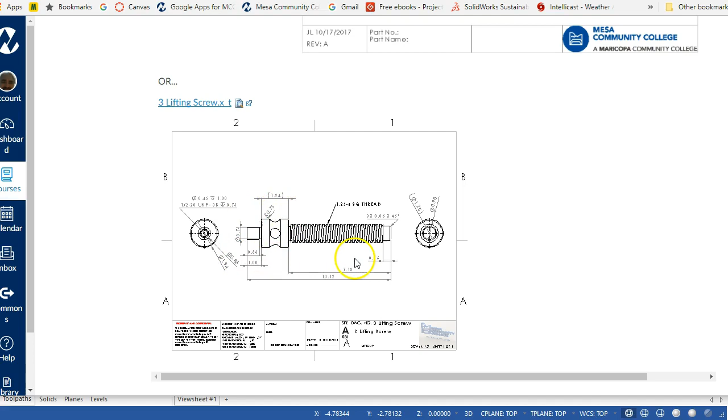So we'll look at chucking this up. Don't know that for being mild steel, we might need to center and have the tailstock come in for support. Anyway, this is our solid, so we're going to File, Merge, and under Types, we will find the Parasolid files, X_T, and then navigate to where I placed those. And we'll bring in the lifting screw.

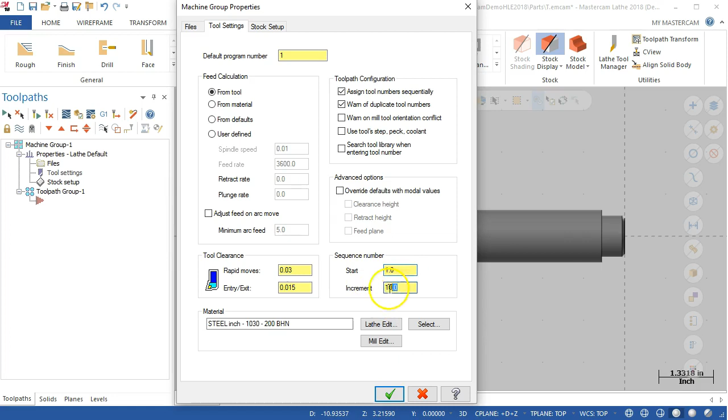Alright, I'm going to go over to Outline Shaded, and we're going to rotate this 90 degrees. Alright, so that puts the 0, 0 on the nose of the part. Now as we rotate around, you can see some of the geometry. Alright, so first thing we're going to do is set the machine to lathe. Go into our tool settings. And we'll stay with the steel.

Properties, we're at 2 inches diameter. Length was 10 and change, so 10 will do it. And if we need to, we'll put in the 1 too. Alright, position along x-axis, we're going to move out 10 thousandths so that there's material to face off of the end.

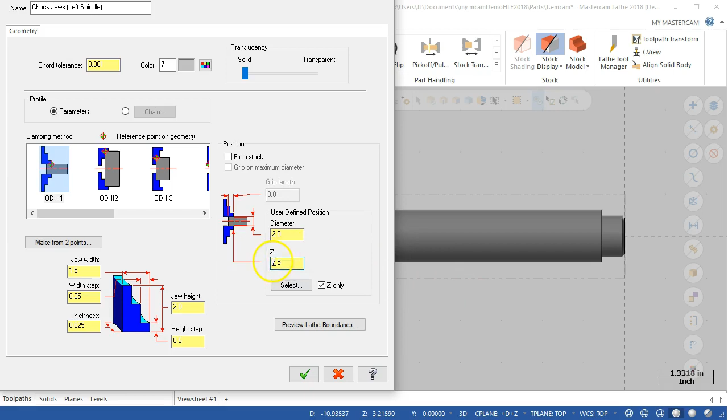Go ahead and accept. Going into the chuck jaws and the properties, we were 7.18 back, so diameter will be at 2 inches, and let's go 7.5. Alright, so I think that's probably going to be negative 7.5, so yeah. So we're pretty much on this geometry with quite an overhang. Pretty much unsupported geometry at this point.

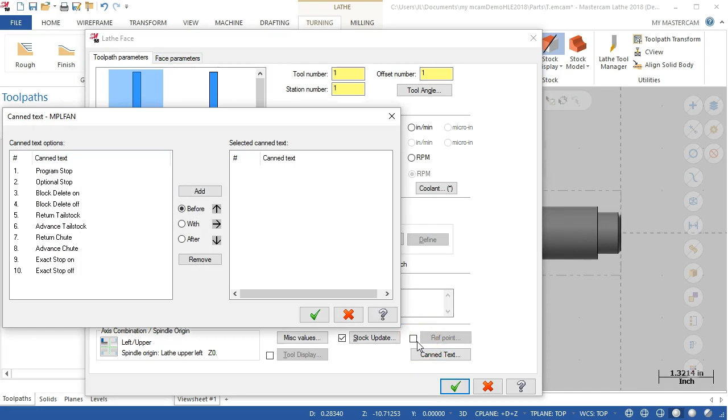So given the lengths, we'll start off with a facing operation. And let's go ahead and stay with the 80 degree. We'll slow this down a little bit. Constant surface speed of 200, and max RPM for this we'll set at 1000 RPM. Alright, going through library tools, tool filters, miscellaneous values, stock update, canned text. Don't really need any of that right off. Probably the one of interest would be the canned text if we needed to add in stops or machine stops.

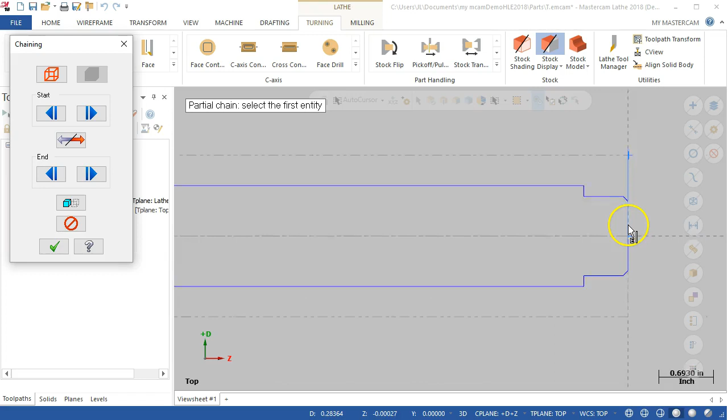Alright, so if I stay with the defaults, entry amount, finish, then that will generate our first operation to establish our Z face. Next operation will be to rough, and we have a partial. Oh, we also have a solid. So as soon as we go over to solid, it switches to wireframe. And we're going to pick the first entity, so I'm going to zoom up to where I can see it, get the arrows in place. And then I do want to come off of the chamfer on the rough.

Alright, so we're going to stay with the 80 degree tool. Back off on our feed rates, so 0.005 of an inch per revolution, and constant surface speed of 200, and then max spindle speed of 1000. Alright, depth cuts, even equal steps, or we can tell it to go to auto. Depth cut, let's go 30 thousandths, minimum cut of 1 thousandth. Entry amount 0.1, exit amount 0. Stock to leave, let's drop that down to 5 thousandths and 5 thousandths.

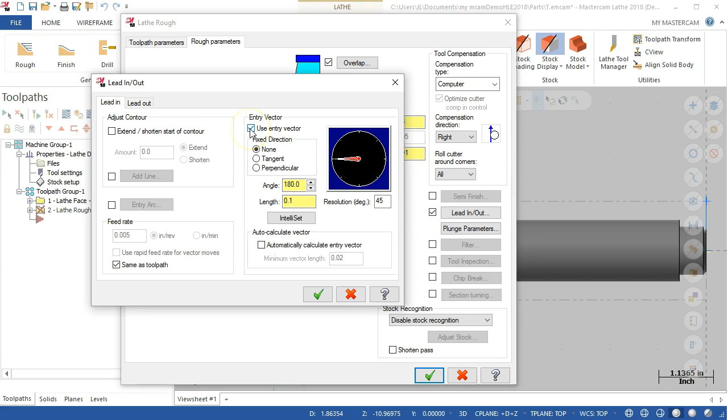And we'll look at the lead in, lead out. So haven't had great luck with the roughing on the entry and exit vector. We already extended the entry, so let's go ahead and extend the lead out. And we'll take a quick look at plunge parameters, that it will bypass any of the reliefs. So I'm going to use the stock for outer boundary and go ahead and start. Alright, so our overruns have a couple of passes, and then we're removing material up through that geometry.

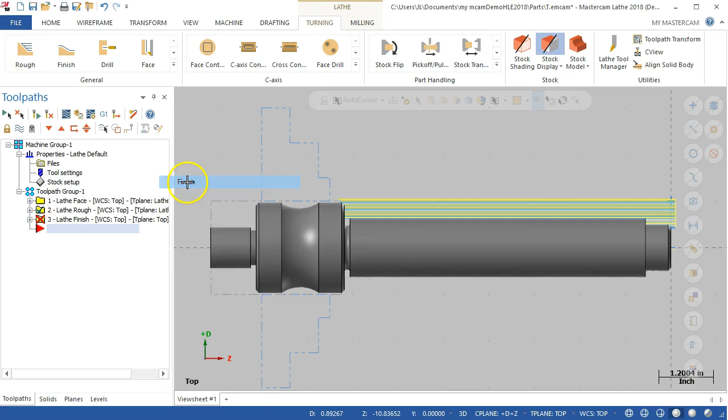Alright, next going in will be, let's go ahead and finish. Pick up the geometry and find our end. And we'll stay with the same tool. And for a finish pass, 2 thousandths, max RPM of 1000. Finish parameters, pretty straightforward. No stock to leave, one finish pass. Probably can get away with the vectors, bringing that out. And then the lead out coming back at 45 degrees.

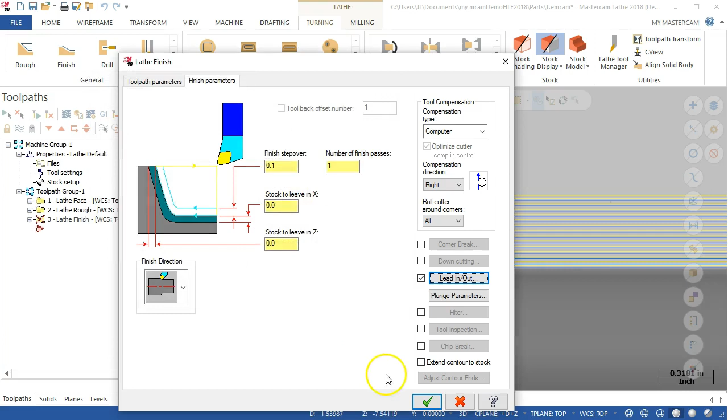Okay, so this one I overran to clear the material. This one we're backing out of. Alright, so mainly when I turn this around and feed back through this geometry, then I would want to overrun that edge. Alright, so we're going to highlight those and turn the display off. Before we can go into the threading, I want to pick up the groove. And for something different, I included the radius in this one. It's not square, mainly as a stress riser, that it would reduce the stress rise.

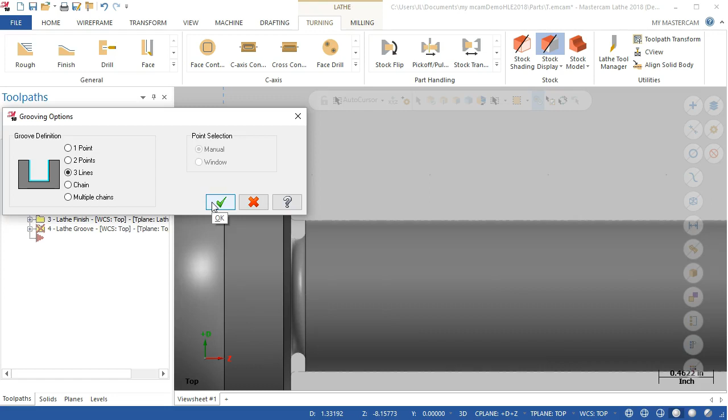Alright, so grooving. Let's go with 3 lines, see if it'll pick up. Alright, so the in, the out, and the OK. Only lines. Alright, so need to back out of that, so Lathe tool groove.

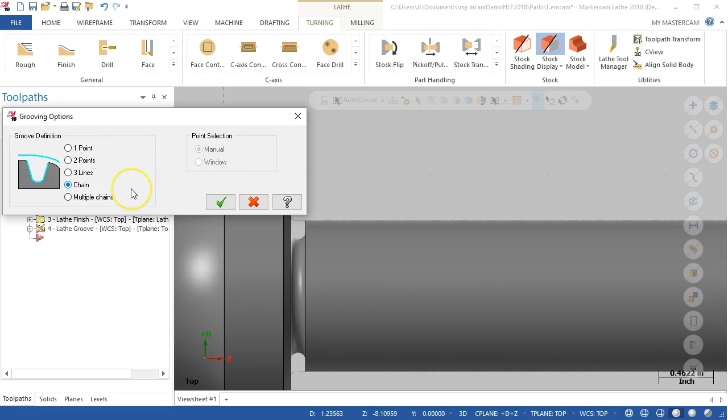So not really allowing me the point, so escape. So go with the multiple chain, and this will probably cause it to come up short, but we'll see how far that gets into the geometry.

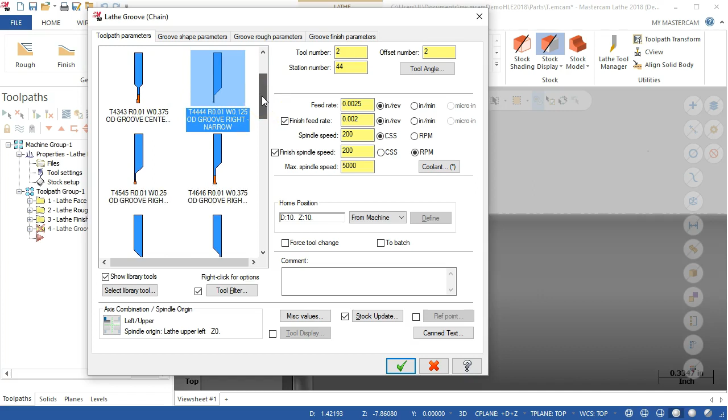Alright, so I would like a 1/8 inch grooving tool. See, and that one's right. Okay, and then we're going to go to double end radius. D is 0.125, B is 0.125. And I'll just take a quick look through here.

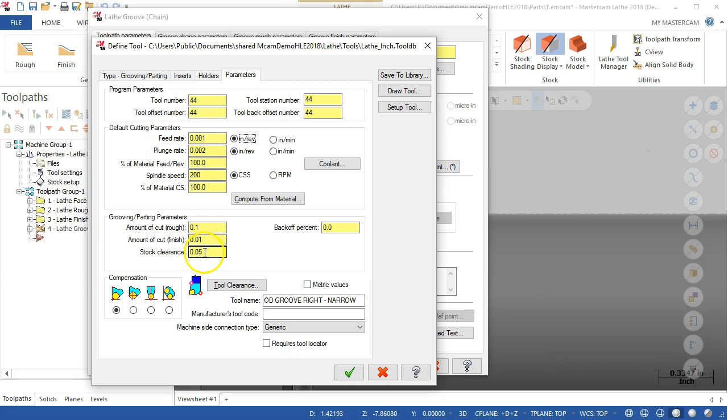And parameters, slow down. Amount of cut on the rough, and then amount of cut on the finish, stock clearance, if we need those. Alright, grooving, shape parameters, angle 90 degrees. We're not going to rough, this is just going to be a straight plunge. Alright, so I'm not really going to get into the step overs.

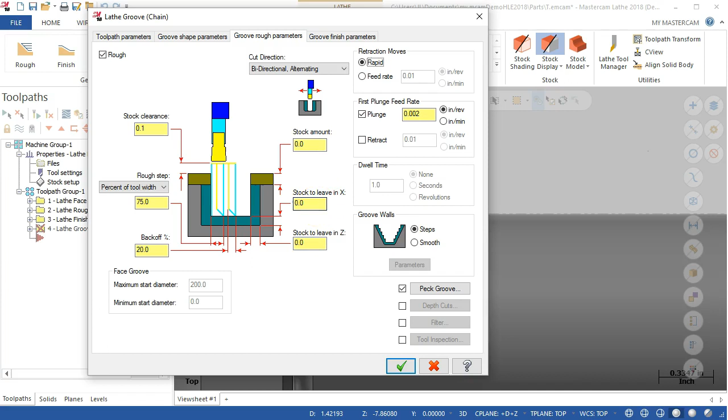So that being the case, maybe you want to do the rough and have it peck. Alright, so 100 thousandths on the clearance. That's going to come down on the wall. Still not doing the steps, stock amount. And we'll go ahead and 0 to leave in X and Z. And then the peck. And we'll stay with the 30 thousandth. And go ahead and see what that'll generate.

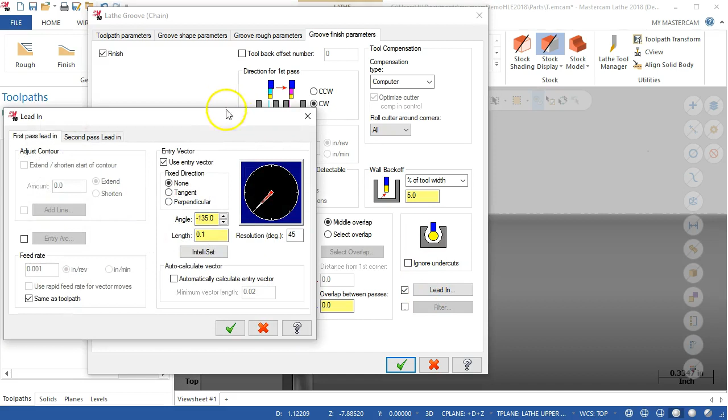Didn't like the toolpath. Now let's see. Nope. Okay, so no rough. We'll try the finish. Double check. Alright, so we get a toolpath and a little bit of relief. Alright, but not really as deep as I'd like, so that may be something that we'd need to identify in the program and update that value.

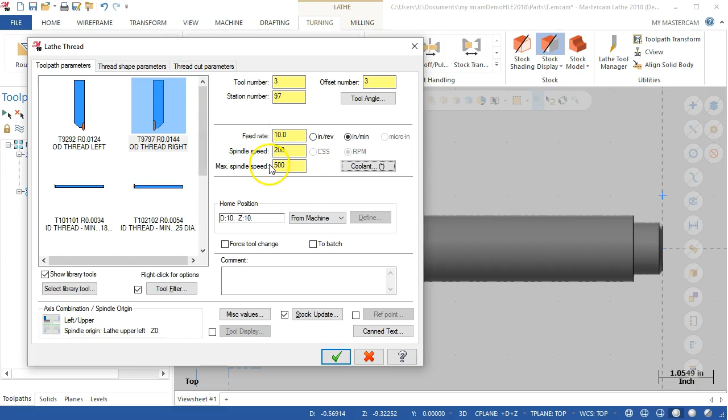Alright, for threading tools, we're not supporting a square tool. So the threading right, threading left. Feed rate of 10. Spindle speed of 200. Max we'll keep at 500. Alright, again, these are kind of guesses as we go along, see what the result is. With the threading and the steel tendency to tear, I'm going to keep that number a little bit lower.

Alright, the lead, we're going to be 0.25, so our 1 1/4 inch for square thread. Peak to peak, valley to valley, 1/4 inch. Included angle, now get a 50-50 shot at it, we'll go 90 degrees. Now we'll try 180 and 90. Really not expecting this to generate our geometry. 1.25 and 1 inch on the minor.

Alright, end position. Minus 7 we made it to 1.8. So let's go ahead and minus 7.1. We'll shorten it up, see how far that'll get. Thread orientation is the OD, taper angle is 0. Really not going to find this thread form, and we'll deal with the allowances after we get into the cut. So 100 thousandths clearance.

Cut depth from equal area. As the triangle goes in on a normal 60 degree, as the triangle gets bigger, then the depths of cut reduce. I think we want to do equal depths. And first cut of 10 thousandths seems a little bit heavy, but a good place to start. One spring cut, clearance, lead in angle, and normally 29 degrees, but I'm going to try 45.

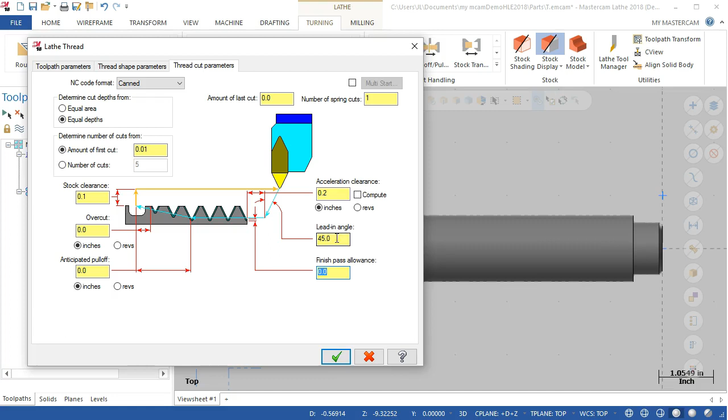Cut with the current thread. I think I was referring to that one, but let's go ahead and see. Alright, so if we go back over to View and into Wireframe, yeah, that's a really neat thread. Alright, so what did I tell it to do? Lead. Alright, well, we stay with those. Stay with the defaults. Okay, and the pull-offs, we're not going to angle it out. Well, usually would see the V's.

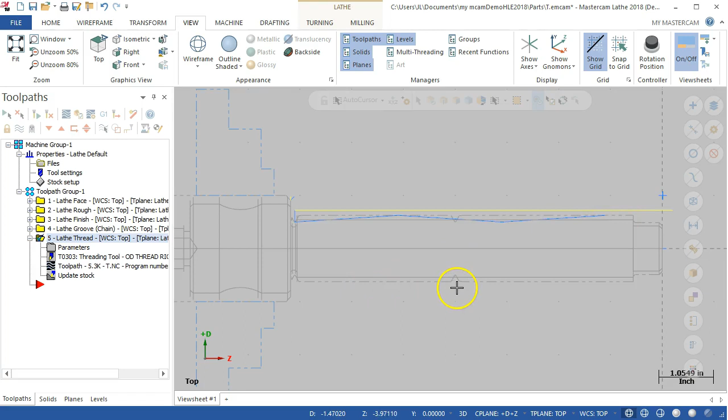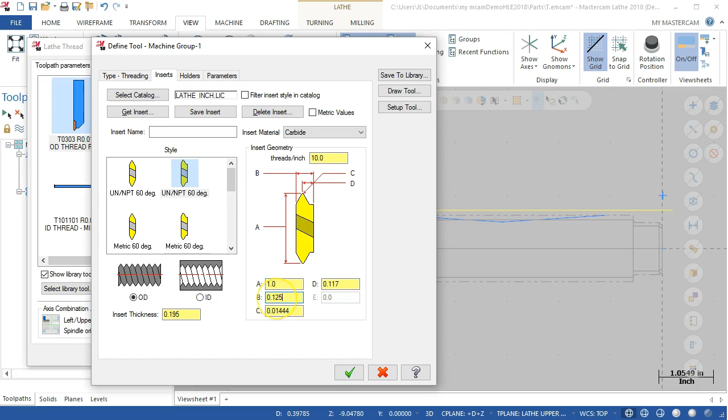And then the other thing was, let's see, I picked right and 14 thousandths. So B with a 0.125. And different parameters. Okay, update.

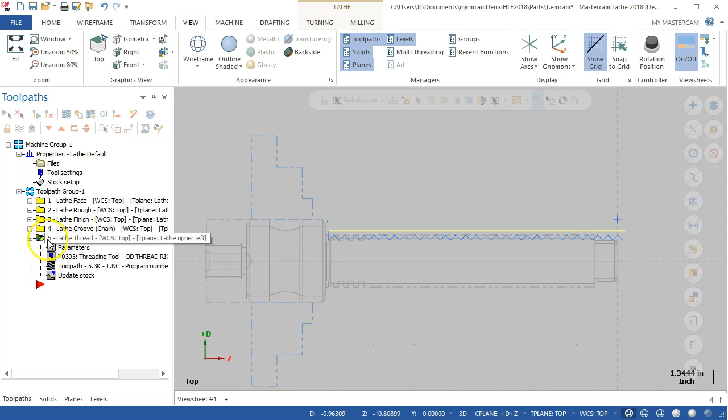Oh, and lead is 0.25. Threads per inch is 4. Alright, so I was thinking inches per thread. So let's try that again. Alright, so see the sharp V's? They're pretty much going through the steps and pulling out at the end of the relief. Alright, so that gives me my first start of the geometry. So I'm going to go ahead and save.

Alright. Then the one that usually makes me want to start a new file is trying to shift this geometry to the back. There we go. Alt 4. Alright, so get it into perspective. Now for the machine group, if I just add another toolpath group, it's going to be in this same orientation. Basically the stock setup, the chuck, everything picks up that same group. So we need a new machine group for the lathe.

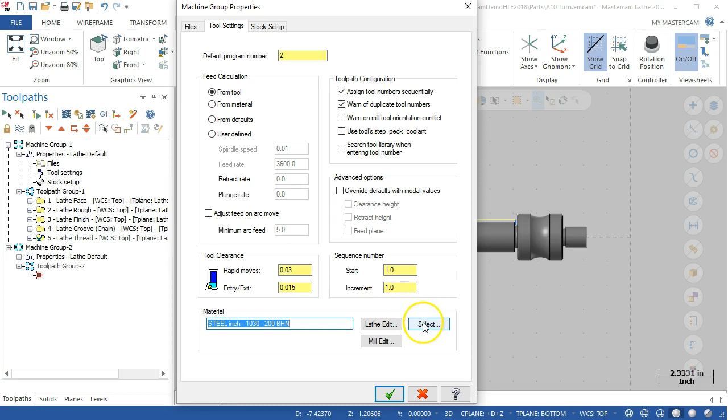And pick up a program too. So we're assuming no sub spindle, single spindle machine. So we're manually going to turn this around and pick up our geometry. Alright, so we're still in the top. And before I go any further, we're going to jump over to the levels, the planes. And currently we're in the graphics and the tool plane. Direction is out.

Alright, so I want to add a new lathe plane with a positive D, and what I'm looking at is the positive D, positive Z, and we're going to stay with positive D but make a negative Z, and that was for our upper left. Okay. So if we make that the tool plane, and let's show the gnomons, so D and Z. Alright, back over to the toolpaths.

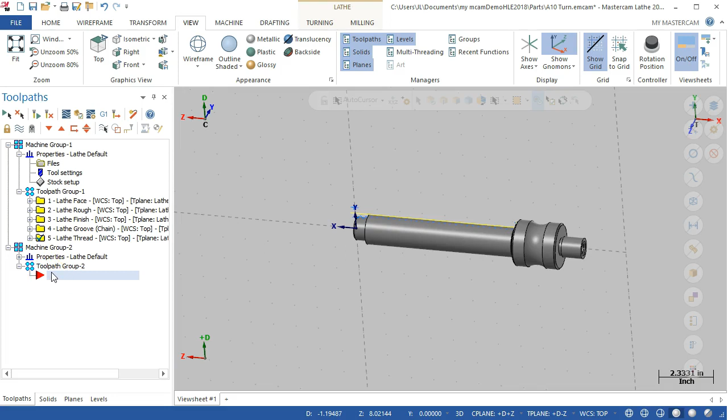And we'll pick up the top plane, and we're going to switch it over to D and Z. Alright, still left spindle, position and orientation. And I'm going to move position on machine, position on stock. We're going to select. Alright, 10.12. And Y. Yeah, that one should have stayed 0. Alright, so in coordinates, global coordinates or world coordinates as opposed to the lathe coordinates.

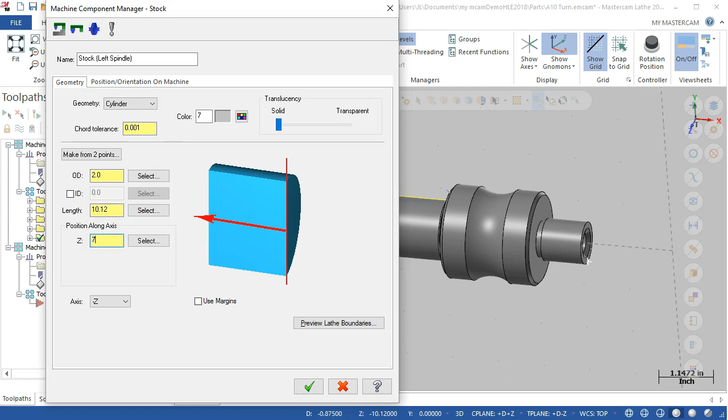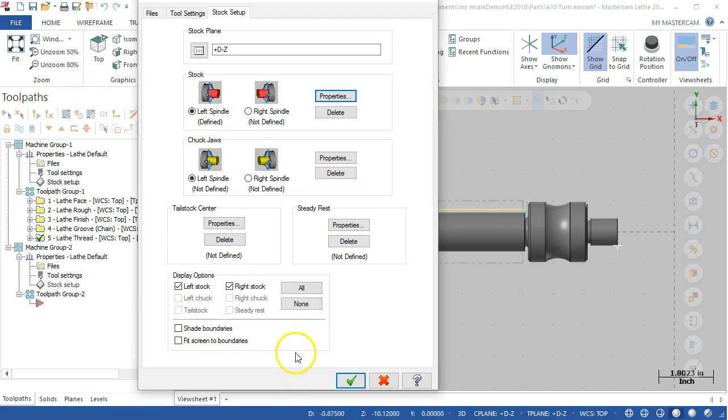Alright, so let's fly this out where we can see this a little better. Still 2-inch stock, length of 10.12, and position along the z-axis 7 inches. Preview the lathe boundaries. And don't think I got it. Got the D and the Z. Alright, stock left spindle. Okay, we only got part of it. Okay, so I have the plus D, Z. Oh, let's go ahead and set the current.

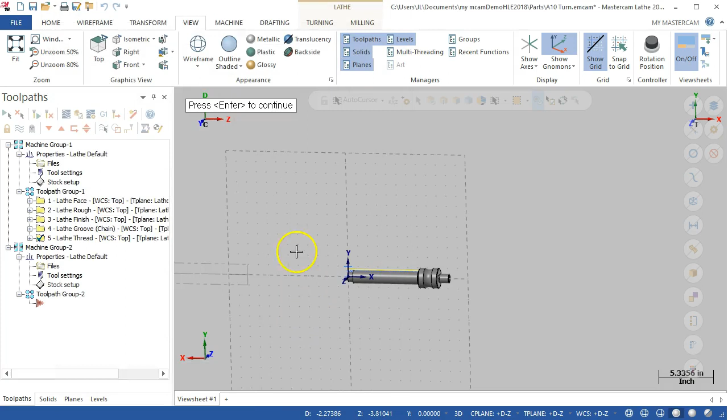Okay, so construction and tool, and then world. Alright, so let's see if we can get this to line up. Okay, so shifted it a little too far that way. Okay, got the stock ramped up. Orientation. Alright, chuck jaws are going to be at 1 1/4. We're going to hold on to the threads.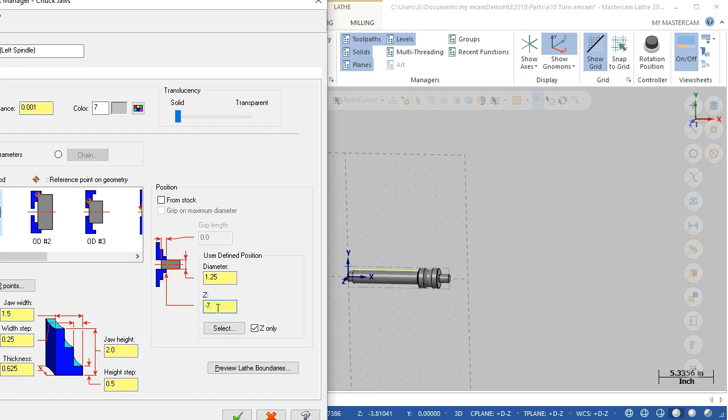Alright, so those are still out there. And so we're going to switch to a positive. Alright, so we're chucked up pretty close to our geometry. I think that's going to do it for the orientation. So critical that we get everything in that plus D minus Z orientation. Alright, well, okay, so now when I go Alt 1, now the origin did not shift. So that's still a problem. So double check the stock setup. Alright, we're at the plus D minus Z.

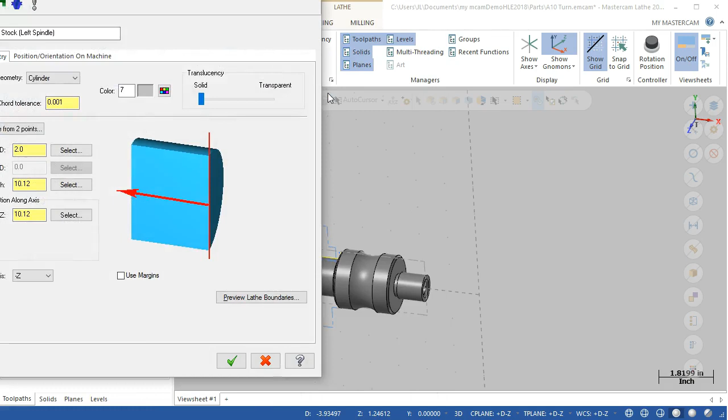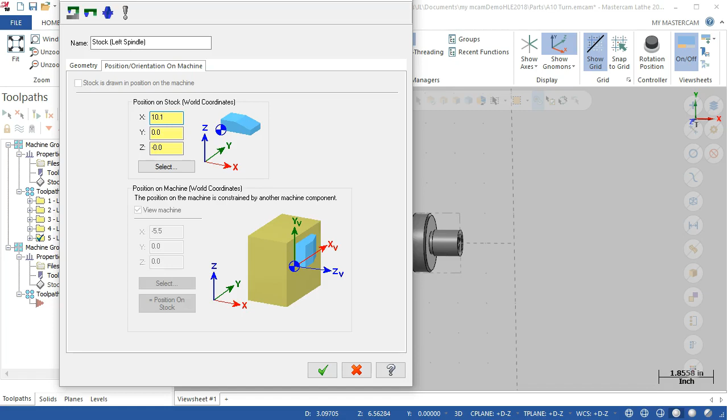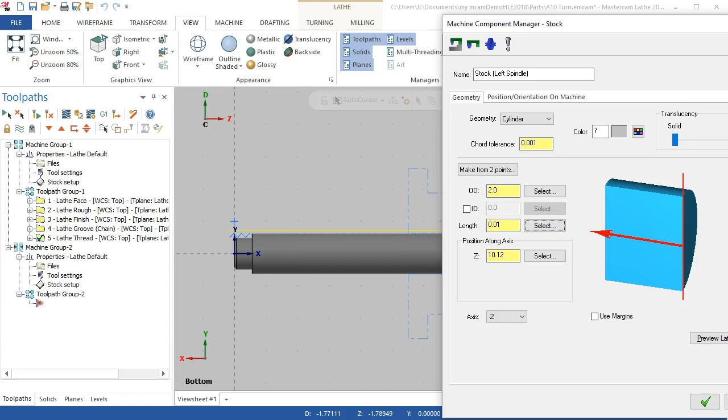Okay, OD. Line to define stock axis. Well, we don't really have a line, do we? Okay. Alt 1. Double check. Let's go with the 10 thousandths. Now that just shifted me back. Okay, so very small. Alright, so my orientation position on stock.

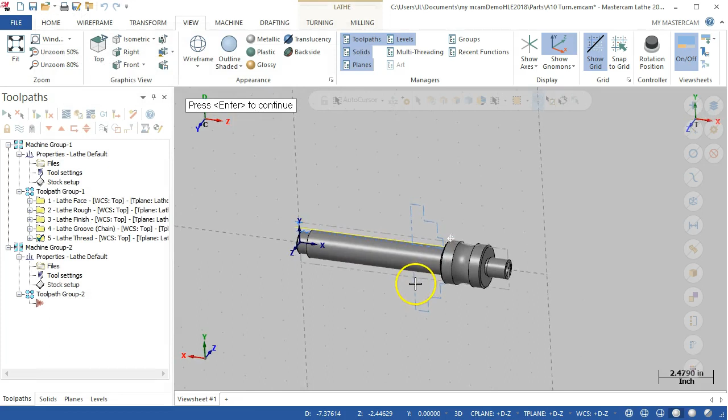Okay, so let's double check. Gotta be something I missed. Alright. So we set the axis at negative Z. Let's shift it to positive Z. Alright, so that took my position along 10 thousandths. Alright, so that's looking better. The origin still didn't update. That gives me a slightly different view. Okay, so that was what I was looking for, is the reference point on the component. But still didn't jump over. Okay, so since DZ didn't move, let's go ahead with one more.

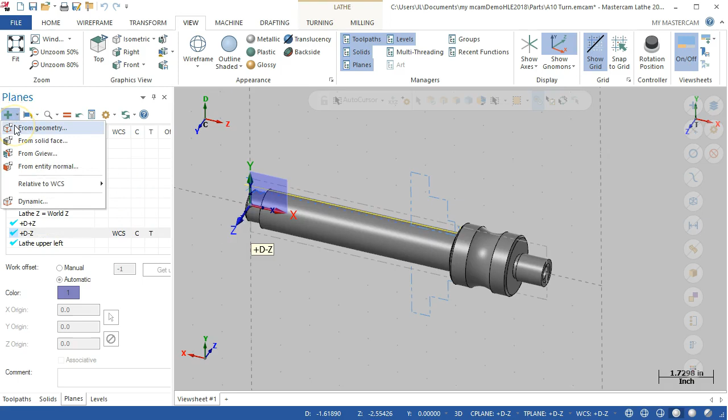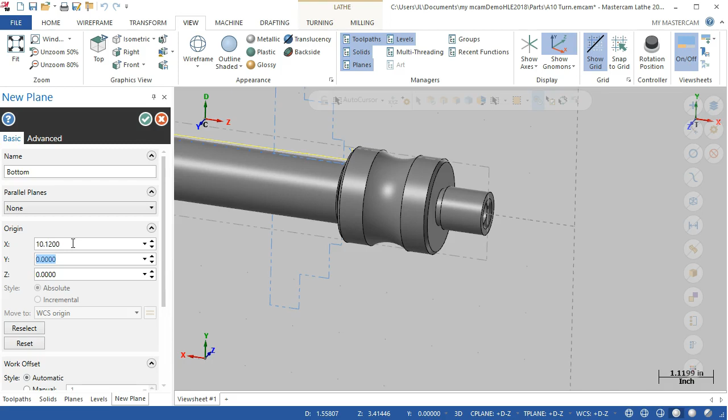Plane from geometry. Set construction plane by geometry, and then select entity. Well, we don't have any flats. Not getting any selection either. Alright, so that's not looking like a good choice. How about from... still not going to let me have the plane. Okay, relative to the WCS, and we were in the top. Now if it'll pick up the X direction, 10.12.

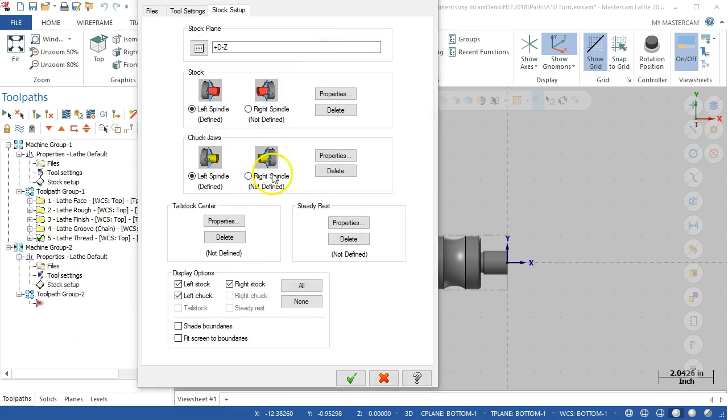Okay, we'll go ahead and set. Alright, and that got my origin. Now it's facing with my Z negative. Okay, so bottom dash 1. Let's go back to the toolpaths group. Make sure that we select that as the coordinate. Double check our lathe boundaries. Alright, so since that updated, I was chasing that the wrong way. We're going to go back to Z negative. Alright, so we got all these fun parameters to setting up that plane. And then it shoots it out there for the jaws.

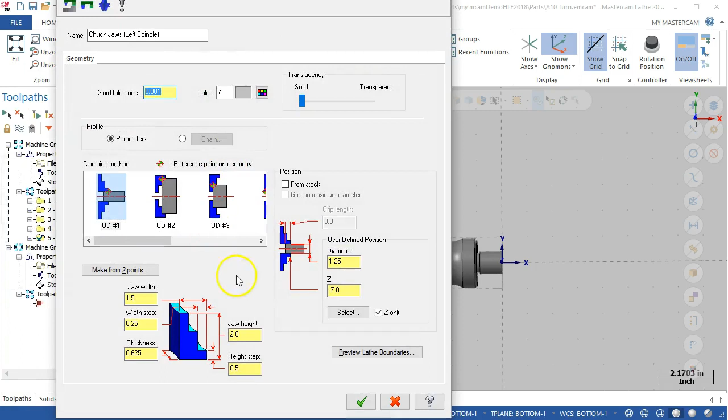And that's probably going to be a little far, but okay, bring it a little closer. Alright, that'll work. Alright, so a little bit of gap, but show us the preview. Alright, back to Alt 1. Alright, so it's one of the reasons I said that going through the process of setting the plane, getting the correct orientation, getting the stock, getting the origin placed on the new nose, it's about as easy just to start a new file, and I can't say that this is the most intuitive process.

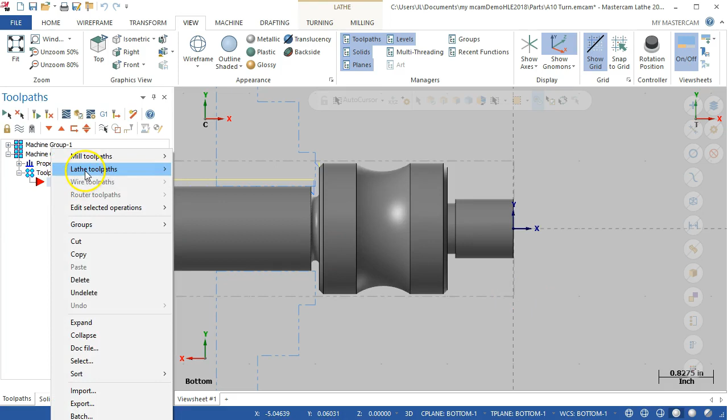Alright, so let's go ahead with the lathe toolpaths and face. Going to stay with our 80-degree. And this is going to be a little more rigid.

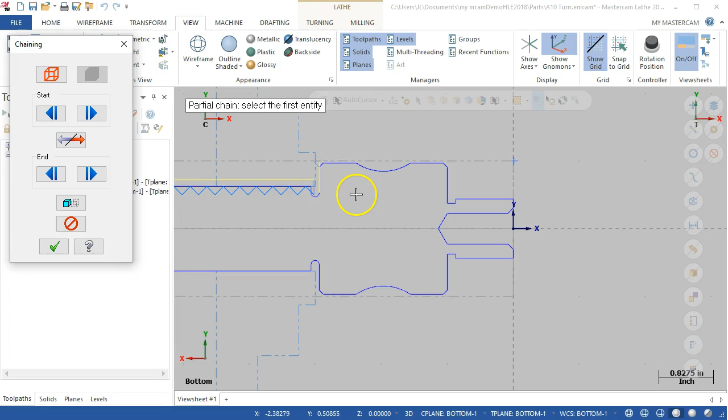Max at 1000 RPM. Stay with the default face parameters and pretty much in and out. Lathe toolpaths. I'm going to stay with the rough. Contour rough would tend to follow. So pretty much this will be the contour rough as opposed to just picking our geometry. One of the things you want to be careful of is you can select this bottom, but since we don't have a turret facing that direction, we will want to pick up our geometry.

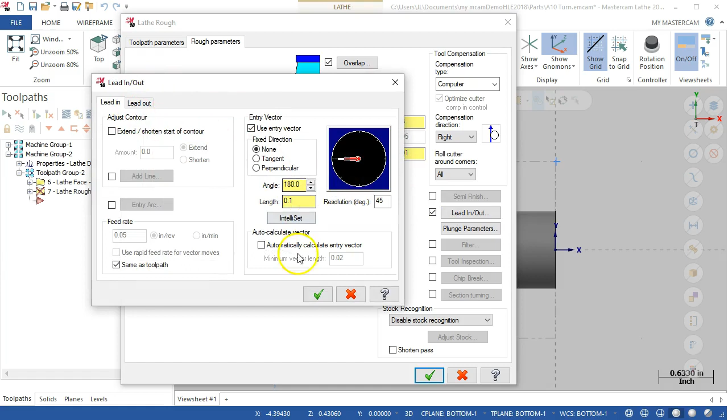Alright, so the roughing. And then staying with the rough parameters, let's go with equal steps of the 30 thousandths still. Not so much lead in, lead out on this one, but the plunge parameters, we'll make sure that it ignores that relief at the end. Okay, so those all go in and make the cut. Previously we ran the stock off that way, so now we have that material. So face, rough, and then we're going to groove.

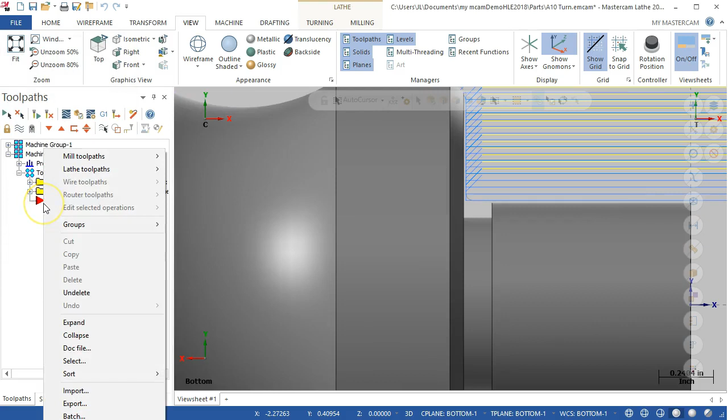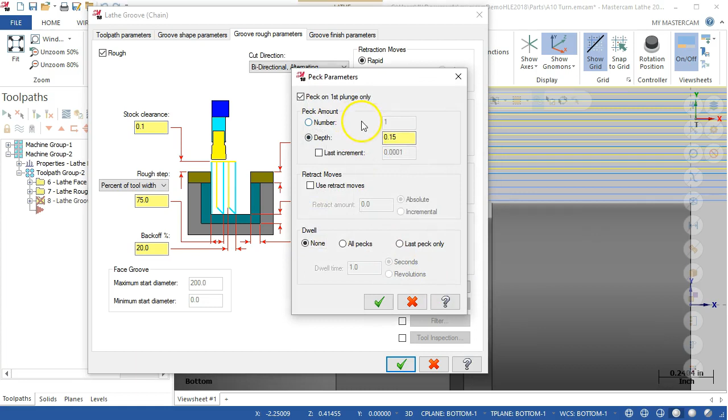So we'll go with the 3 lines. And in. Must be the same length, alright. Alright, so let's just try the chain. Alright, so we'll need to double check. Alright, so standard insert. And drop that down to 1000. Go back to 1000. Let's see, at 1/8 of an inch, we're pretty much, and we'll see if we can peck. Just went 150 thousandths to see if it's going to cooperate.

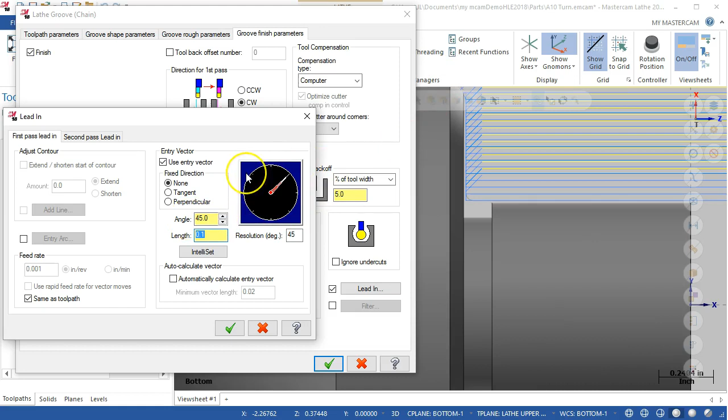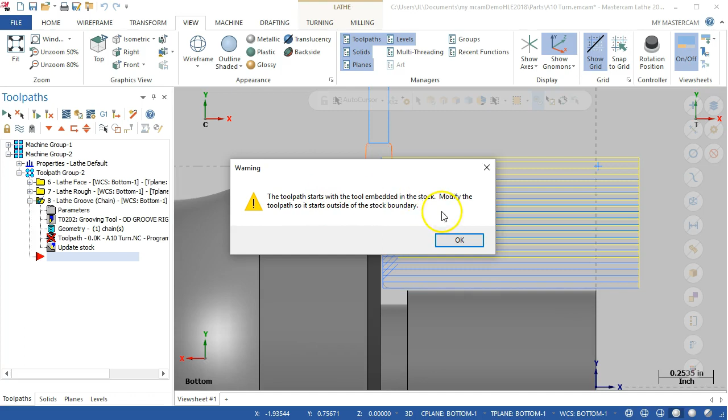Alright, so rapid move violates tool clearance boundary. Just save the operation, go back into the parameters. See what we have for the lead-in. Minus 135 degrees. That's going to be off. Alright, so it picked up the geometry out here. Well, since it doesn't want to plunge, embedded in the stock. Alright, looking at the chain, that should have picked up all of that.

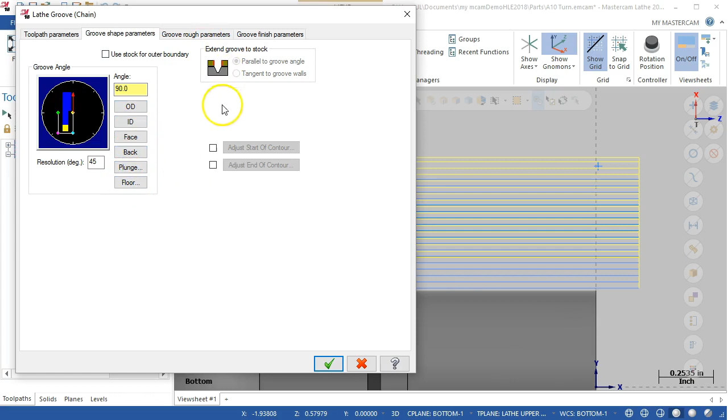Okay, 90 degrees. Groove parameters. It's not really going to matter. Okay. So cut direction negative, starting from the outside, moving to the end. Moving in towards the spindle, no finish. Have the tool path. Let's go ahead and turn the display off for the rough. You can see the tool path come in and groove out our center. Alright, so there's no parting operation, but we do have the couple of undercuts.

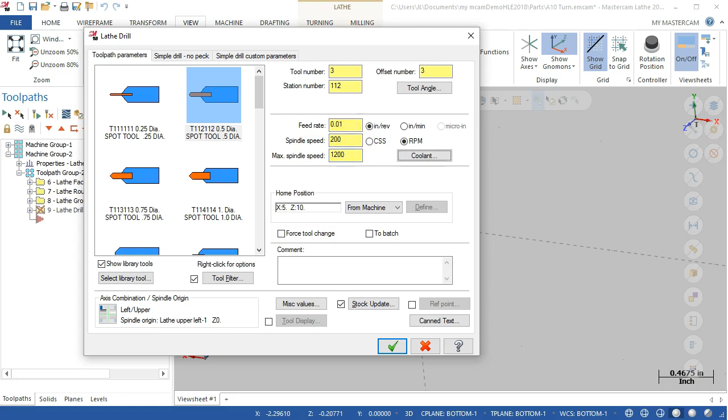And then, let's see, going to the center, we'll go with the drill. So let's go with a spot drill, 1/2 inch. 10 thousandths of an inch per revolution, 200 max spindle speed. Now we'll bump it up a little bit. Depth minus 0.5. So 1/2 inch. And I need to back that off. 1/2 inch will generate a 1/2 inch all the way up to the edge break, but that's going to cut into the threads a little bit. So 0.4. Not worried about the drill points, location, and no custom parameters.

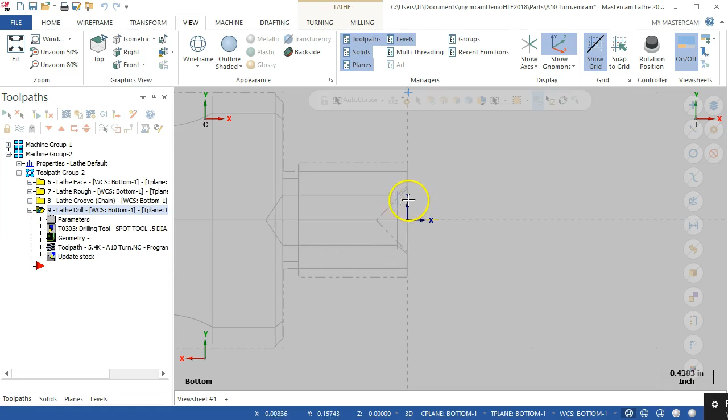Alright, so let's go back to wireframe. I want it picked up the spot. Oh, so since I didn't get a center drill, I got the spot drill, so 90 degrees. I'm going to need to change that to minus 0.25. And update. Alright, so that's just basically going to do an edge break. If it was a center drill, we'd be going in a little deeper and have a 60-degree angle to contend with on those first couple of threads. Alright, then going in on the drill.

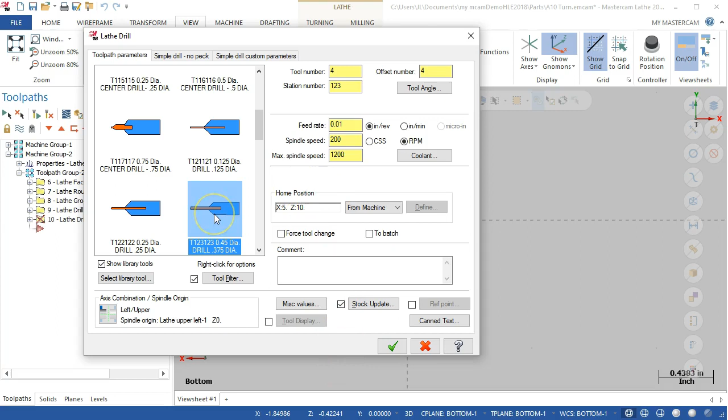Alright, default drills. Well, let's go with the smaller. Okay, we have center drill, 1/8 inch, 375, 1/2 inch. Alright, so it picks up the diameters, but when we go to the library tools, we're not treated to the same listing. So tool geometry for a 1/2-20 will be about 450. All right, we need to look at the drill chart to see what's going to be close to that, but that'll give us better geometry. So it updates, creates a new tool.

We're going to switch over to peck drill. -1 1/4. See how far that gets. First peck will go 50 thousandths, and subsequent peck 20 thousandths. And then if we need clearance, 5 thousandths of clearance. Alright, from the end of the part, 0.25 and 0.1. No custom. Alright, so 1.25 went a little too far. And regenerate the toolpath.

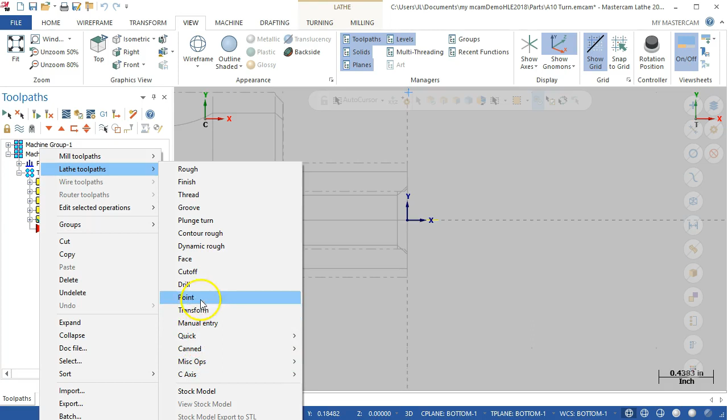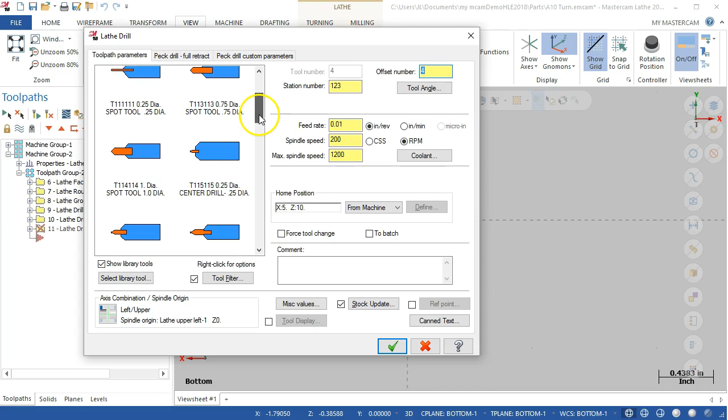Alright, so lathe toolpath. Alright, so we're not set up. If I tell it to go thread, it's going to want to do a boring operation, or an internal ID threading operation, not set up for a tap. So what would be start then, I have to check the codes, is let's go ahead and treat it as a drill. We're going to find the 1/2 inch diameter drill.

And we're going to let it know that it's a right-handed tap. 0.5, threads per inch is 20. I'm not so concerned with overall lengths as keeping the drill, but let's go to the parameters. So 200 RPM would amount to 10 inches per minute. Alright, so we're not doing the peck, it goes to a tap.

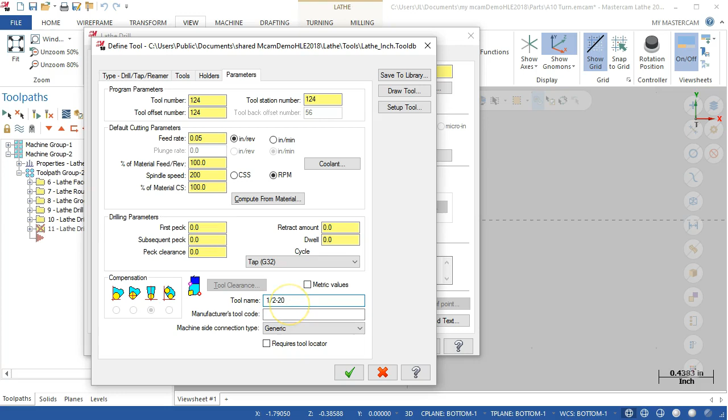Okay. Go from the peck drill over to the tap drill. And dwell. Let's go 0.88. And no custom parameters. Alright, so that does the relief and gets us through the geometry. Alright, so make sure to save.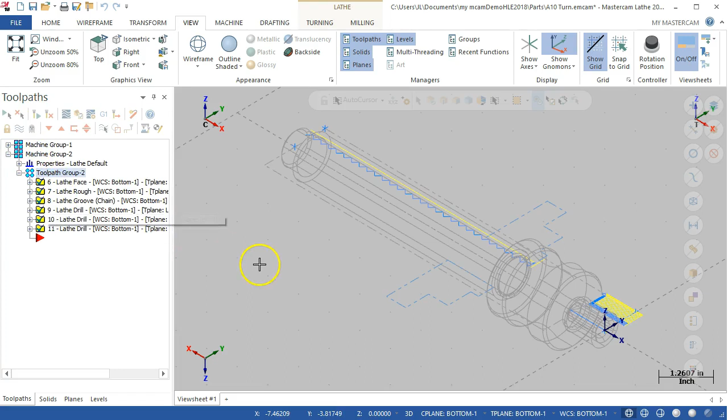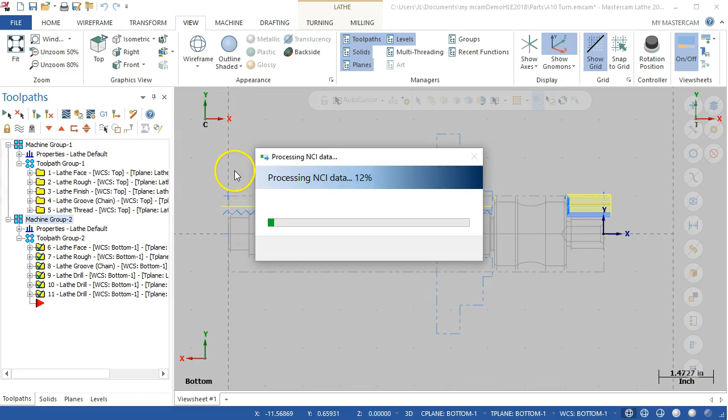And let's go ahead and look. Alright, so I'm back to Alt1. Let's fit. Okay, so all selected. Now we'll go ahead and do the back plot. Yes, that gives me the basis for the geometry. Alright, so if we just go to the machine group, and verify, we'll get one end. Alright, so that generated all the geometry.

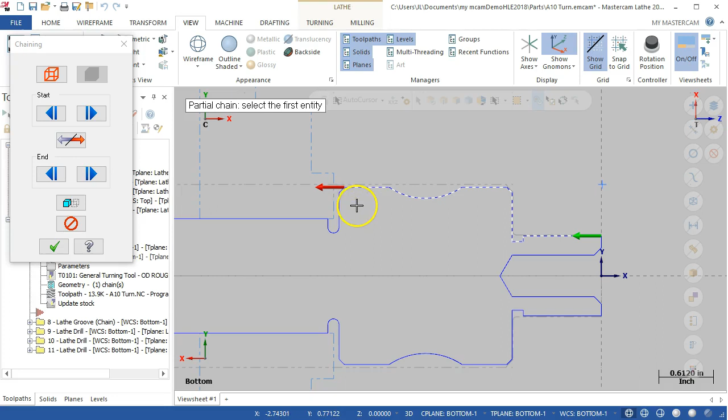Oh, and actually, this roughing pass, we should have brought it down to 2 inches, so I missed. Alright, so on the rough, let's see, we'll go into the geometry. Let's just go ahead and rechain. Pick the first, and then pick the last. Alright, so now when it sees that groove, it becomes a little more important what we're going to give it on the plunge parameters. So the 80-degree tool doesn't have a lot of end relief to allow it to get into that geometry. And we'll go ahead and regenerate.

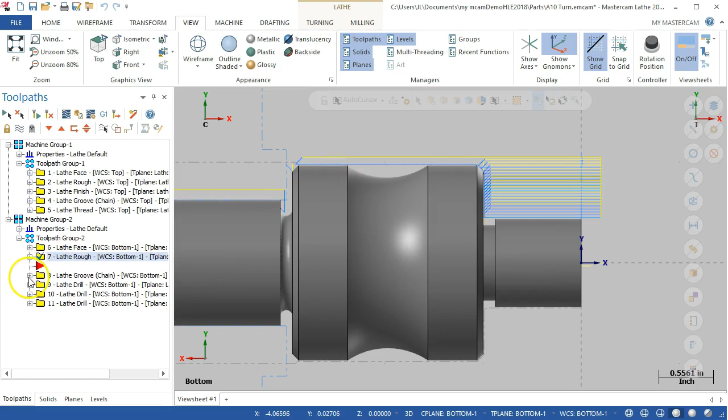Okay, so pretty much one or two passes across the top. And we're getting some extra surfacing there, so let's go to the outline. Okay, that looks better. And did I not put a finish in there? Apparently not. Alright, lathe groove, lathe drill. Alright, lathe toolpaths, we're going to go to finish. Pick the same geometry, stay with our settings.

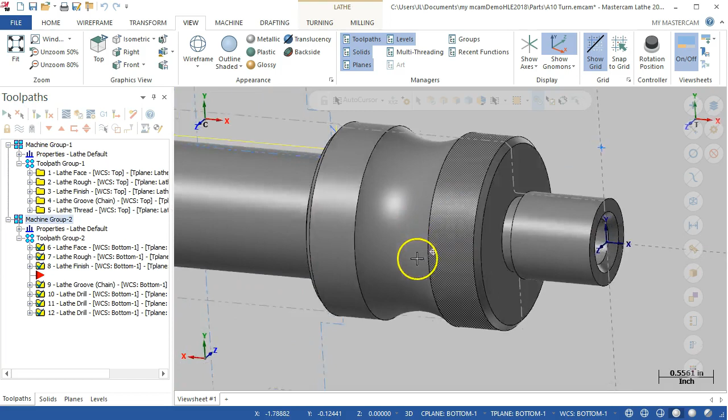Finish parameters, plunge parameters, alright, making sure that it's still going to jump over. Alright, so that comes in and does the finish and back retracts away from the spindle. Alright, so we'll let those update and then hide the display. Okay, so we've gone through the operations lathe toolpath. Now we'll go with the contour rough.

And we'll need to go to a tool that has quite a bit more relief, so 35 degree. We'll go with 10 thousandths, constant offset. Okay, so 0.005 for 5 thousandths. Alright, lead in, lead out, 180 degrees, go to 45, depends on where it leads in though, so let's go to 135, and then lead out at 45, that should be okay. Minimum cut, 10 thousandths, and we're going to go one way, so, okay.

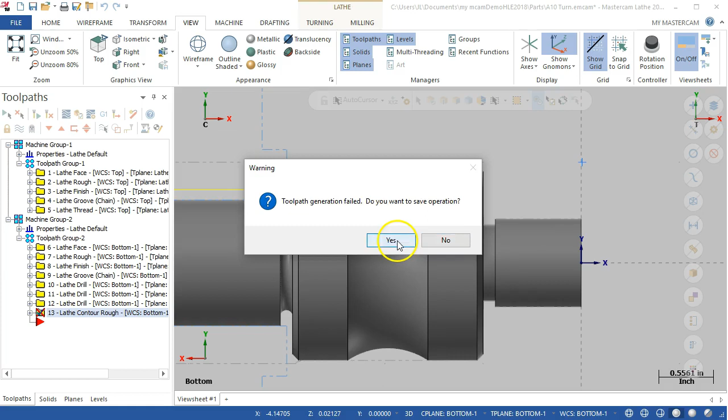Alright, so lead in, let's extend. I think the directions are okay. We'll just give it a little bit extra. Okay, so let's double check the geometry. Oh, and plunge parameters. Alright, clearance angles. Now let's increase those a little bit. See if that'll get it away. Stock to leave amount.

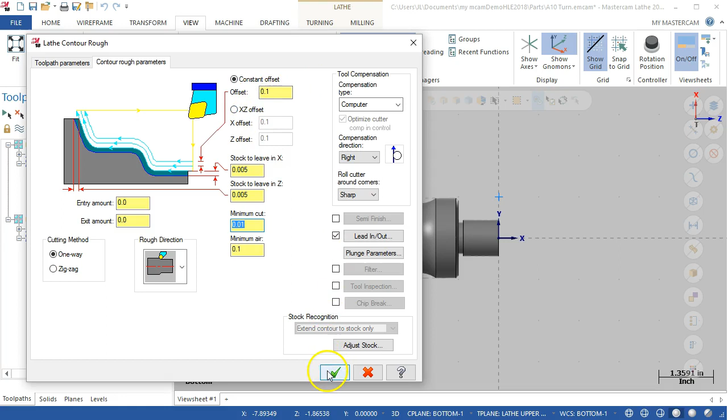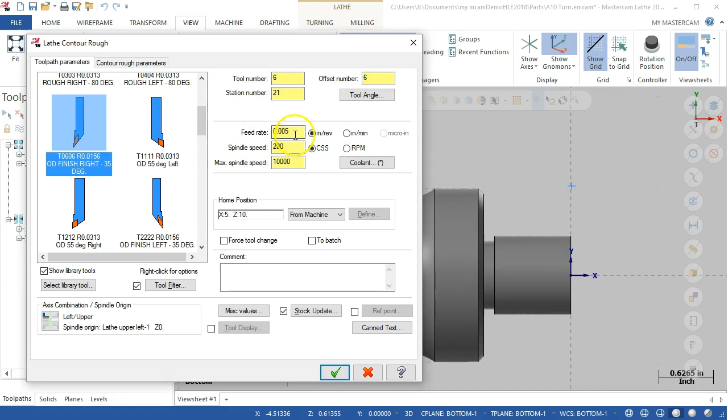It may have been changing the wrong one there. Okay, so I've got too many settings going on here, so I'm going to go ahead and delete that operation. Add in lathe toolpath. We'll go back into the contour rough. Set the direction. Alright, we'll go back and find the 35 degree. Alright, so we won't get too crazy on changing numbers this time.

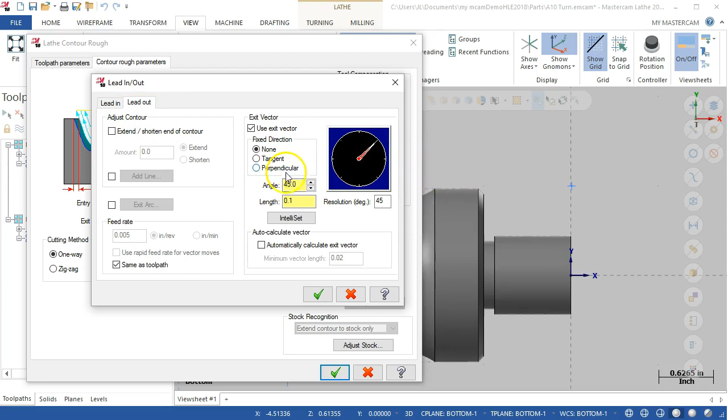Stock to leave. Plunge parameters are allowing in both directions. Lead in, lead out. Well, if it's coming in from this way, let's go -45. So come in at an angle and +45 on the exit. Made one cut. Alright, need a few more than that. That's still pretty heavy. Alright, so minimum cut, 10 thousandths, minimum error.

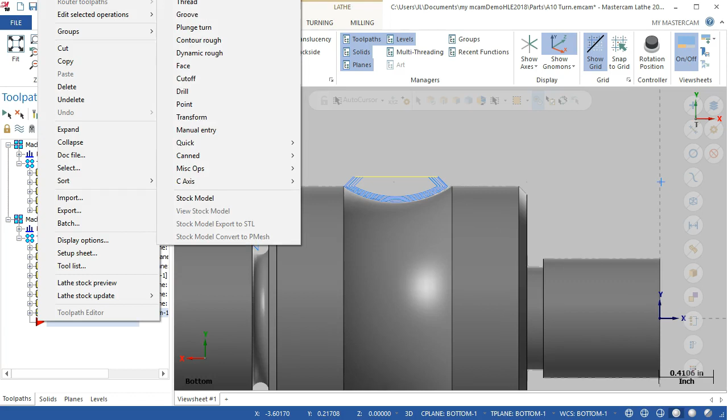Entry amount. Well, would have liked to add a few more passes than that. Okay, so an offset of 1. Let's see if that'll give us a few more. Alright, so in, take a couple of passes, and then the last one will be to finish. Pick up the same geometry. And we'll stay with the defaults.

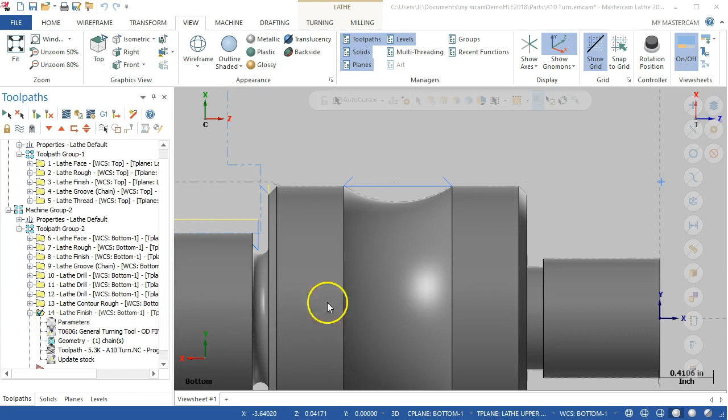Let's see, we decided that that was a -45 and lead out a +45. So let's go ahead and hide the display. Well, and that one went, let's double check the plunge parameters. Alright, so it told it to ignore, which is exactly what it did. There we go. So it picks up the pass. All right, so let's go to the verify. All right, and then we'll switch to the machine group. And verify.

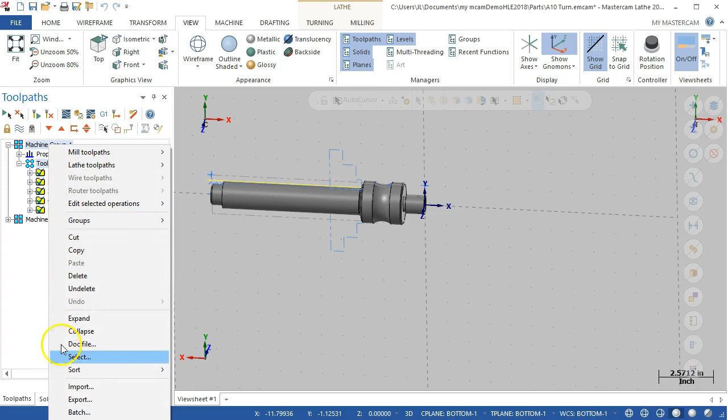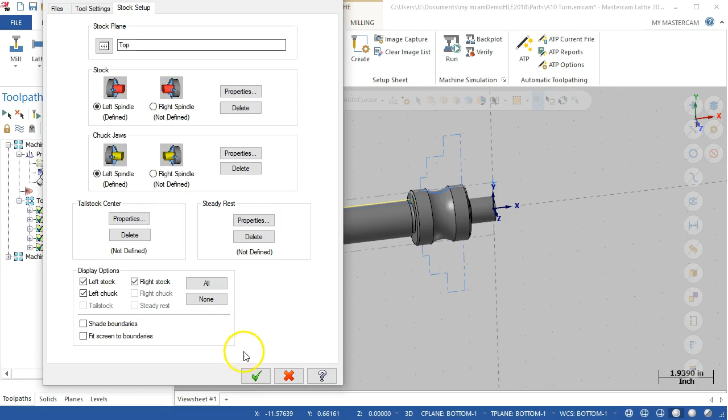See. So not in the active machine group, choose cancel to select the active machine, or OK to continue with current settings. Alright, well, we're just going to run into the... Okay, so let's check the active setup. Okay. Alright, and there's our strange looking threads, but they're in there. Alright.